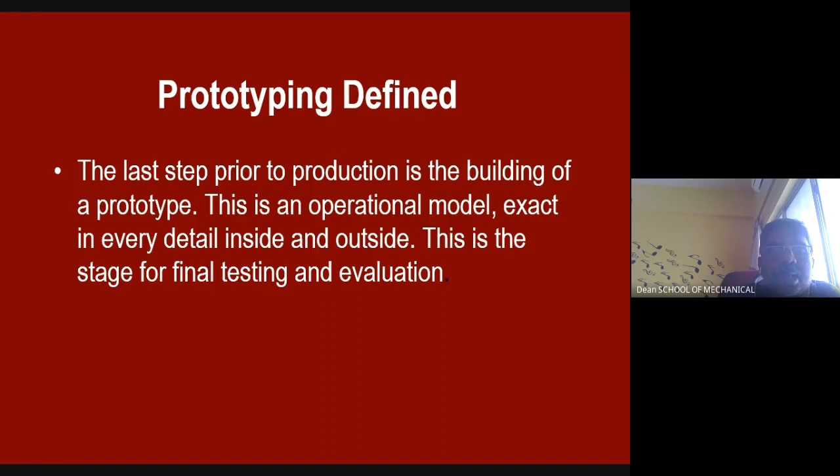Moving on to the introduction part, how is RP classified, and what is the basic principle and concept behind RP technology?

RP technology refers to techniques or methods that allow designers to produce physical prototypes quickly, within a limited span of hours, ensuring the basic functional requirements of the product. It consists of various manufacturing processes by which a solid physical model of a part is made directly from 3D CAD model data.

Whatever component you want to produce should be drafted in standard software and converted into proper CAD files, which are then linked to the RP machine to produce the parts. Different software can be used for this conversion. Depending on accuracy, integrity, tolerance value, need, and mass volume production, we can choose any one of the RP manufacturing processes. There is a wide variety of processes available, and we can choose based on reliability and cost cutting.

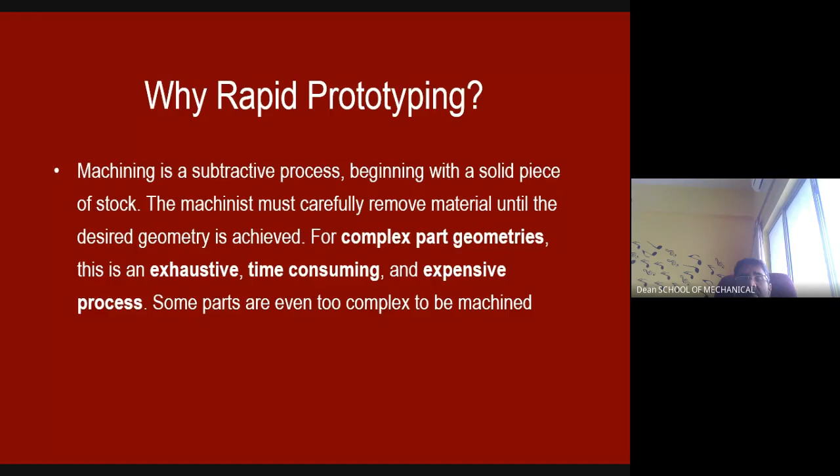Depending upon the concept of RP, we can group the RP techniques in various perspectives.

Generally, all the processes are based on 3D CAD data, a 3D computer aided design data in terms of coordinates and file format. Whatever parts we want to manufacture should be transferred in terms of dimension to the computer with CAD files, either Creo or some other standard software. These 3D data are sliced into thin cross-sectional planes by a computer.

These cross-sections are sent from the computer to the rapid prototyping machine, which builds the part layer by layer, one layer over another. The first layer geometry is defined by the shape of the first cross-sectional plane generated by the computer.

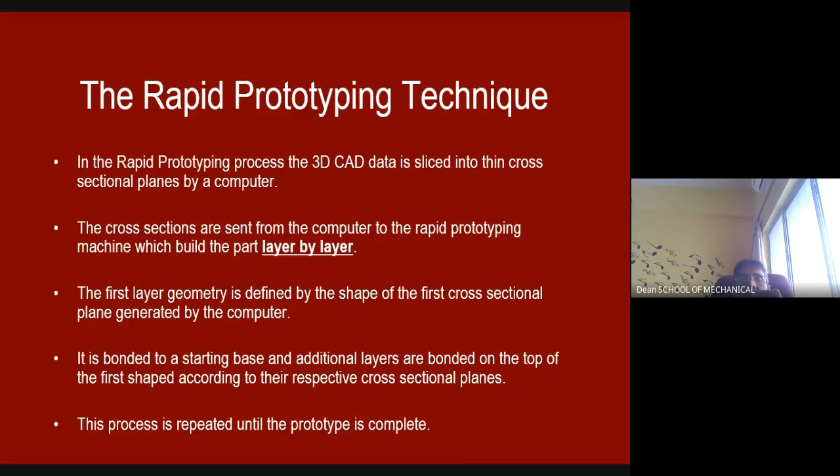The machine can move to and fro in the particular table direction with the particular table specifications to form the required dimensions layer by layer. This process is repeated until the prototype is completed, meaning until the required dimension is obtained. This is the general concept of the RP technique.

What is the RP technique? It is a method in which the part is created by a layer additive process, adding one above another called layer additive, or subtracting called layer subtractive. You can even build the part this way.

Rapid prototyping is a method in which the part is created by a layer additive process using specialized software like Creo, ANSYS, Abaqus, CATIA, or whatever software is available in the market. Using this specialized software, a three-dimensional CAD data or model is cut into very thin layers or cross sections, starting with AutoCAD up to high-end software.

Then, depending on the specific method used, such as sintering, fused deposition modeling (FDM), or SLS, the RP machine constructs the part layer by layer until a solid replica of the CAD model is generated.

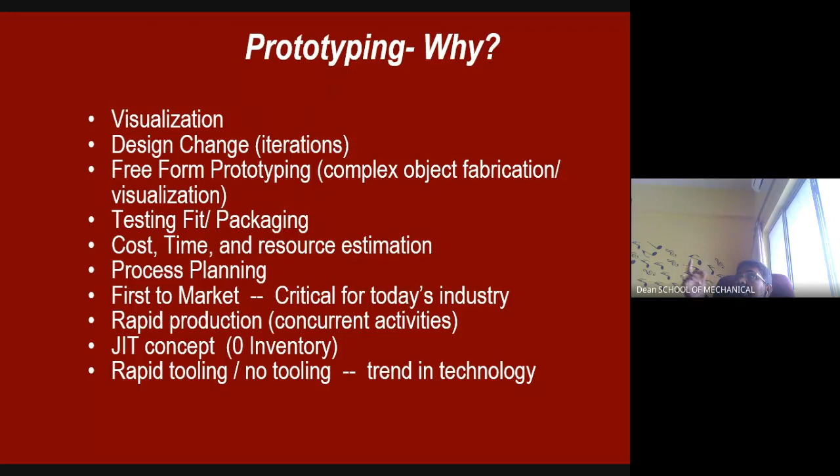And this prototyping is further grouped based on different aspects. One is design verification, tooling, and concurrent engineering. If you take design verification - design for manufacturability, design for the exact manufacturing content required, design for assembly, design for maintainability, design for reliability, design for quality, and design parameters like tolerances and allowances.

So these are all the reasons chosen for adapting prototyping technology. Then concurrent engineering - you have heard of concurrent engineering, also called simultaneous engineering. Tooling - another domain we are focusing on is tooling. Then comes reverse engineering.

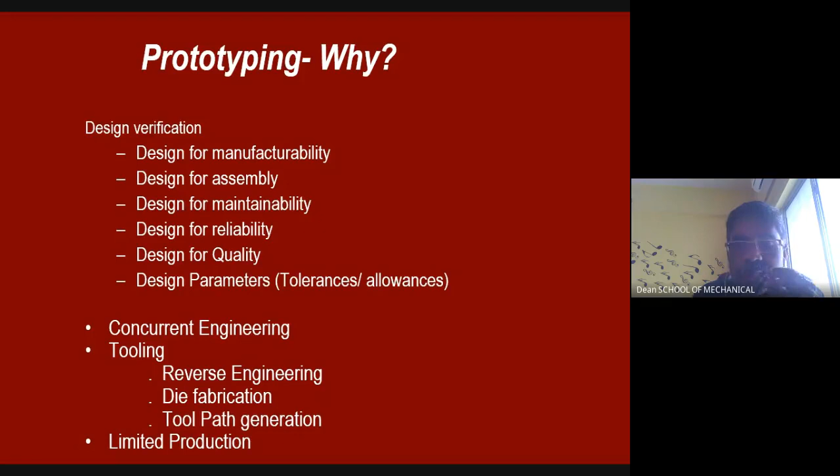Then tool path generation, that is in CNC itself, and limited production. So these are all the areas where prototyping technology is required or emerged.

So this block diagram shows how you build the part - design a part, convert the part, build the prototype. To design a part using computer-aided design, best is a 3D solid model. And those parts designed in a CAD model are fed into or converted into CAD files. Normally the CAD files are in .stl or IGS format.

.stl means standard triangulation language file, or you can say one more file is called IGS, initial graphics exchange specification file. So these files are fed into a machine to build the part. The part can be built by different methods - either FDM method or SLS method or some other method - you can build the part.

This is a general definition, or the block diagram, pertaining to RP technology. Design a part using standard software, and those CAD dimensions are converted to suitable CAD files, normally in the format of .stl or .igs files, and those files are fed into the RP machine to build the required prototype.

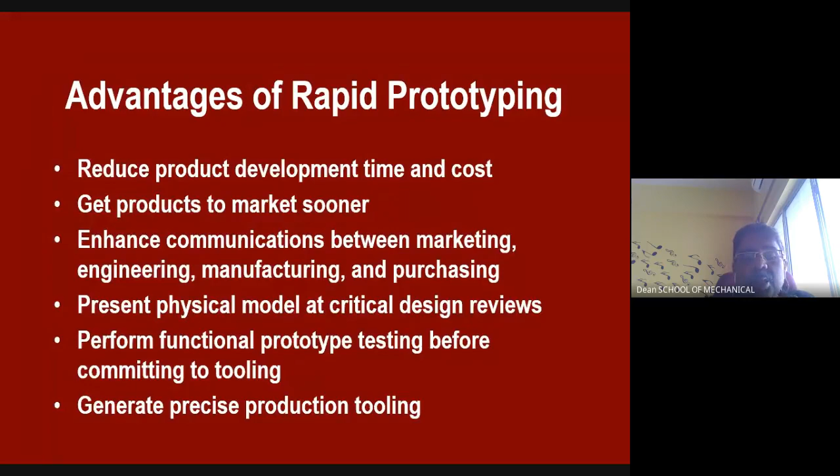So what are all the benefits, as an entrepreneur, as a manufacturer, as the company owner, I can enjoy by introducing RP technology in my firm? Then another question arises: what are the benefits of introduction of RP technology as an entrepreneur, as a manufacturer, as a company managing director? What are the benefits and gain?

First one is visualization, verification, iteration, optimization for design engineers. In order to get a very good design of a particular product, you build the initial diagram, initial design, visualize it, and verify the functional requirement. If changes are required, go for the iteration and do the optimization, especially for design engineers.

Second benefit is communication tool for simultaneous engineering. Like concurrent engineering, we have one more terminology called simultaneous engineering. It is a communication tool for simultaneous engineering. And the third one, very important, is form and fit test of components - the final form and fit test of the components.

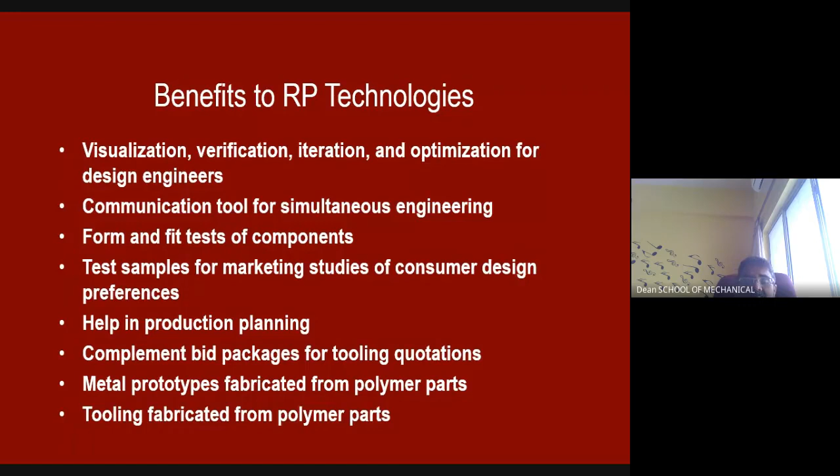Now move on to the types. We already discussed we have different types based on liquid, based on powder, and based on energy source. We can group them into different classifications. The first one is liquid based, solid based, and powder based. So majorly, RP technology is broadly grouped into these three categories: liquid based, solid based, and powder based.

So it depends upon the requirement, depends upon the need, depends upon the specification, depends upon the end use. We can opt for any one of the RP processes, either solid or liquid or powder based. That means the raw materials are prepared into these three groups.

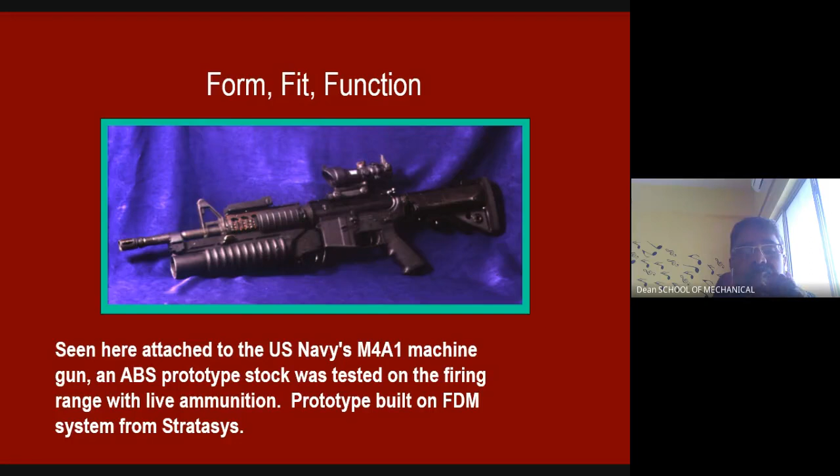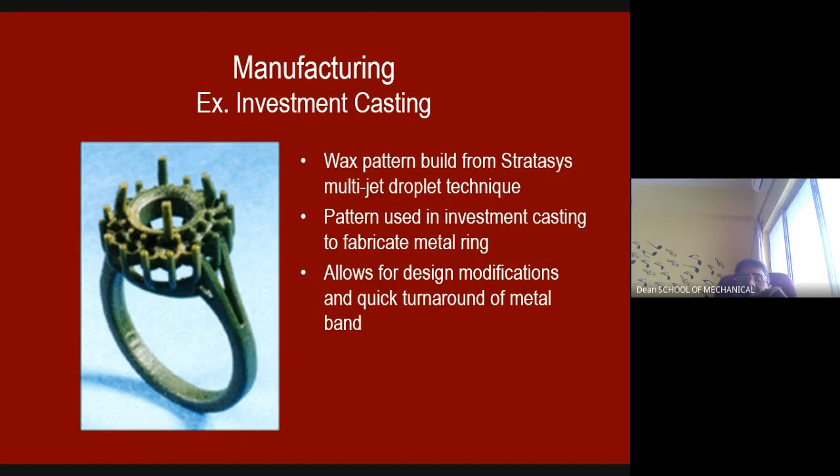Medical use is where you can find the current applications of RP technology - for example, models of cerebral arteria malformation and surrounding skull with data from CT angiogram, built with a stereolithographic RP process, allowing advanced neurological surgery planning.

For example, if a person has a complicated tumor in the brain, before going for regular surgery the surgeon wants to check and train beforehand since he needs to perform a complicated surgery. So he builds the exact type of skull with brain using ABS material, with data transferred from CT scan, and practices which areas need to be removed. This is the major use of this technique in medical industries.

This allows advanced neurosurgical planning, because surgery is very critical and life-threatening, so it must be done in a perfect and crucial manner. We have to train and perform a number of surgeries with a prototype - that is the need for RP in the medical industry.

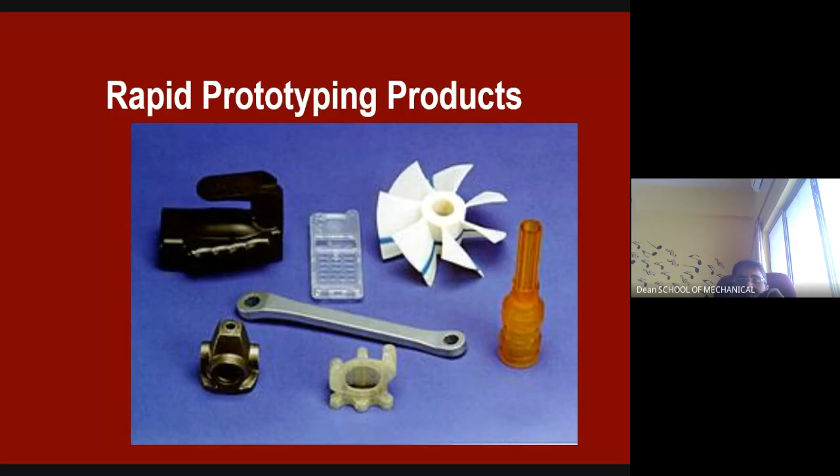Based on the application and types, there is a classification of RP technology. One is the subtractive process, which we call the material removal process - examples are milling, turning, grinding, and machining centers. Used for prototype production, the degree of automation varies.

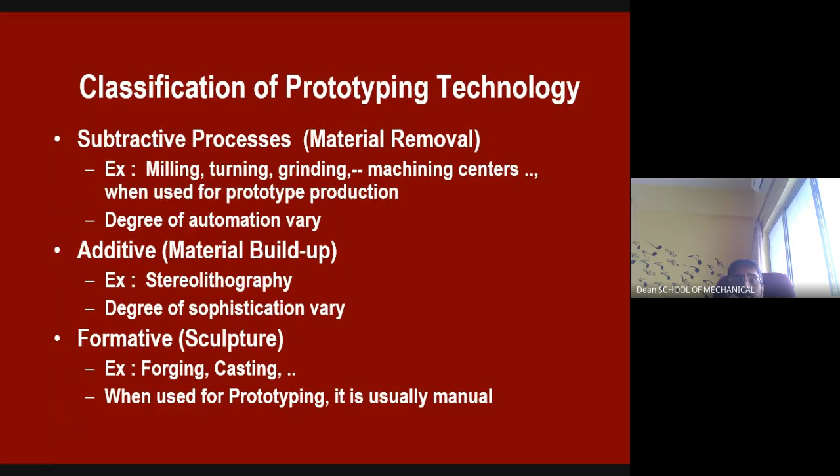The next one is additive, material build-up - we can add material to get the required part. Examples are stereolithographic processes, which we call SLS or SLA. The degree of sophistication varies. Then there's the formative type, that is sculpture type - forging and casting. When used for prototyping, it is usually manual. This is the classification of prototyping technology.

To move on to the rapid prototyping process: the resin cure, made from liquid plastics, we can use a cubital solid process, or a ground curing process, or a light sculpture layer-at-a-time process, or a 3D systems process, or stereolithography. All these use resin as raw material. These are the different versions of liquid-based RP technology - one is cubital solid.

Invented by a company called Cubital, another is ground curing, called solid ground curing, and light sculpturing layer-at-a-time, introduced by another company. And 3D systems, or 3D corporations, introduced a particular liquid-based system called stereolithography. Cubital developed one product, and 3D Systems produced the other.

The next one is lamination. This was invented by Helisys - we call it LOM, laminated object manufacturing. So these are all the different RP processes.

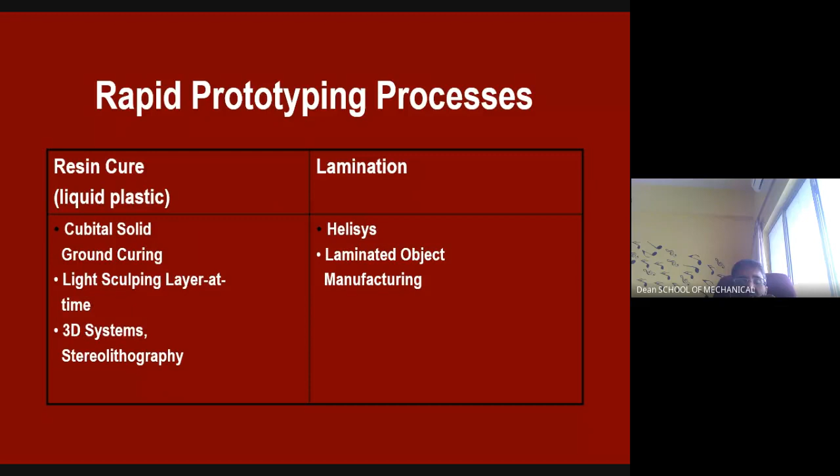This sophistication of technology plays a major role in different domains: one is the fabrication process, another is the degree of automation required, and third is the ability to build complex objects. For the fabrication process, the process must take material in some shapeless form and turn out solid objects with definite shape - this is called the fabrication process.

For the degree of automation - a high degree of automation is needed. Since prototyping is a stage in a cycle, the technology is expected to enable automated chaining to the before and after links in the cycle. Finally, the ability to build complex objects - the more complex the build object, the more sophisticated the technology.

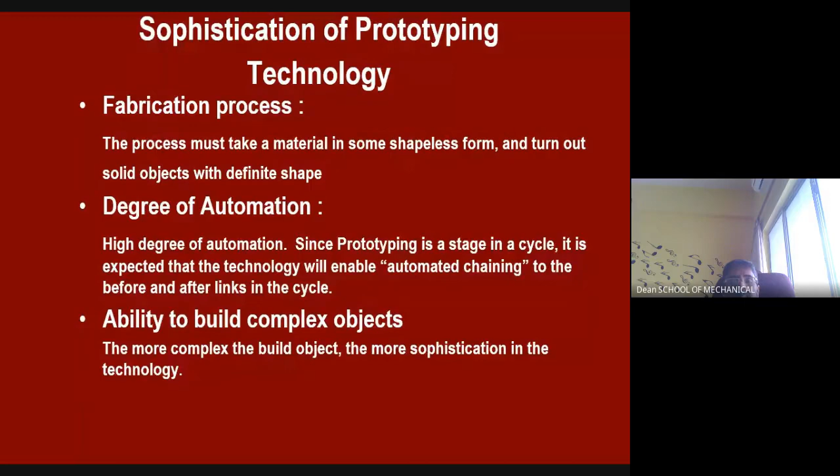And tooling, there is no tooling at all. Less tools is better. So why is the technology sophisticated?

I am listing all the features. One-shot operation, so a single part is produced with entire dimensions, entire assembly. One-shot production, no assembly of parts, etc.

Time: the less the time, the better. A closeness to serve the purpose of the prototype, that means accurate representation of the design. Flexible: should be a flexible one, that is modification, additional parameters, and scaling will be done whenever required.

Equipment depends upon the size, weight, maintenance, and cost. We can group into different RP equipments. Economical, both equipment and operating cost.

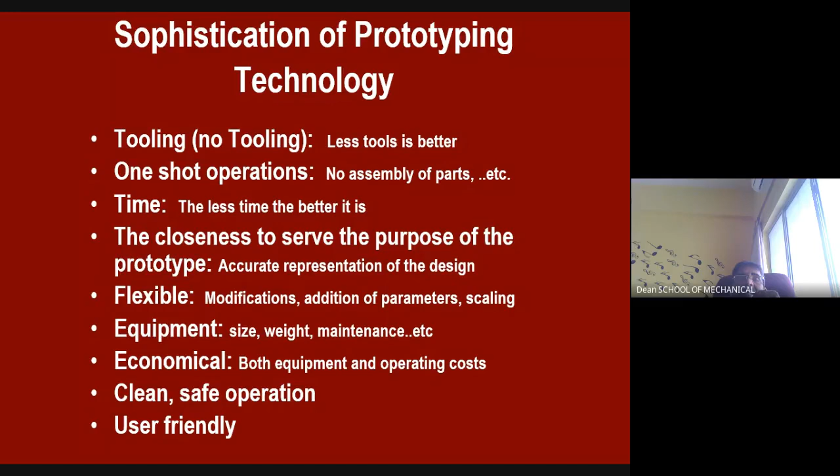User friendly: more versatile, more user friendly. There is no need of a skilled operator required. We need minimal skill to run the machine. Once you know the conversion of CAD into the required geometry, you just switch on the machine, push a button, and it starts producing. So there is no need of a skilled operator. It should be a user friendly one.

So based on the above benefits, advantages, and technology development, we group the RP process into 3 major divisions. Generally nowadays many more divisions are coming, but from 1987 onward these are the major divisions.

One is fused deposition. The companies are Stratasys and FDM. Then sintering, the company is called DTM Corporation. The process is called selective laser sintering.

Then the third one is ballistic particle, called BPM, ballistic particle manufacturing. The company is called 3-Dimensional Printing, or you can say droplet formation, ballistic impact primitives, and surface formation. So these are all the 3 general categories

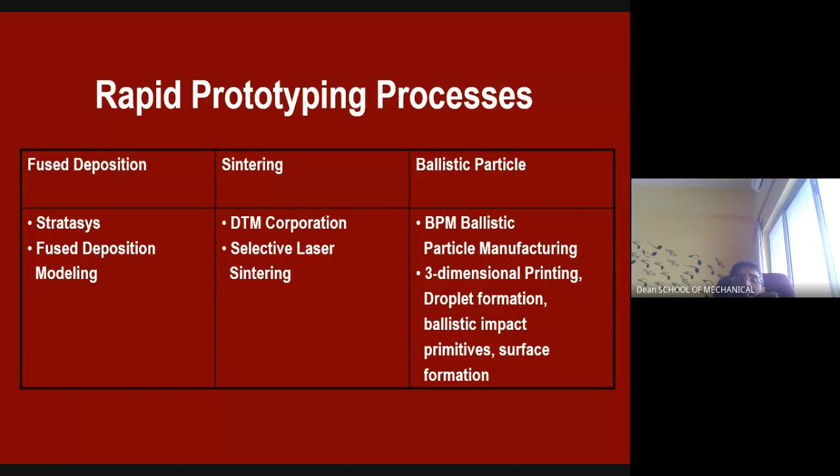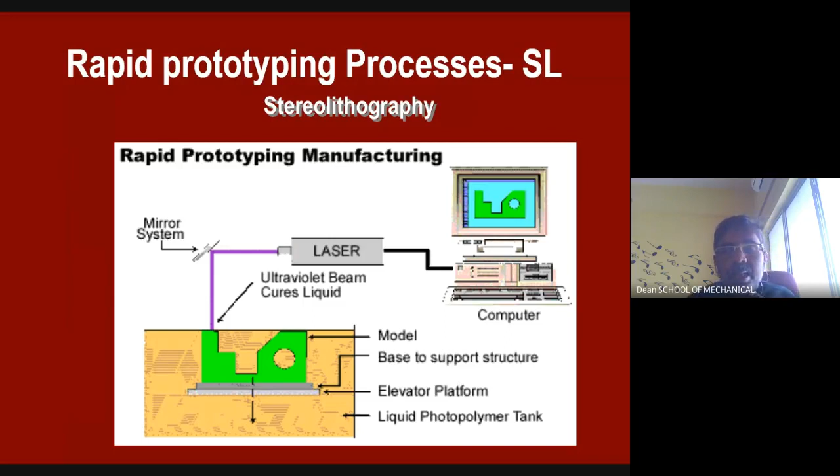Another view of the stereolithography process.

For stereolithography, we use a laser. This is the component to be fabricated, a mechanical component with a boss and a circular flange. We are able to manufacture it by depositing in a tank and build the part. So the resin is poured inside this tank.

The dimension of the part comes from the computer. Once the heat from the laser emerges, it starts hardening and builds the layer by layer. Once the required dimension is obtained, the bottom plate and support are removed and dissolved, to be used once again for the next production.

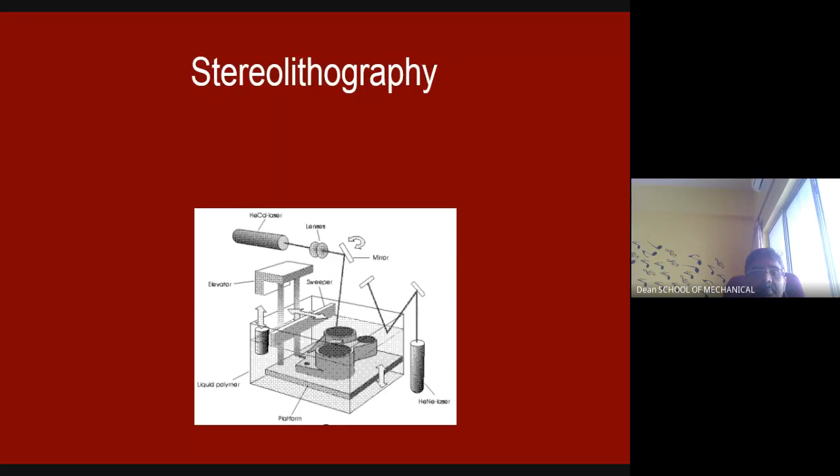This technology emerged in the year 1986 and was patented. This is the first kind of RP revolution. This technique builds 3D models from liquid photosensitive polymers that solidify when exposed to ultraviolet rays.

See the concept? The technique builds three-dimensional models from liquid photosensitive polymers that solidify when exposed to ultraviolet rays. As shown in the figure above, the model is built upon a platform situated just below the surface in a vat of liquid epoxy or acrylate resin.

A low power, highly focused UV laser traces out the first layer, solidifying the model's cross section while leaving the excess areas liquid. This is the basic concept of stereolithography. It uses a liquid resin and laser heat to harden the resin part and get the required product.

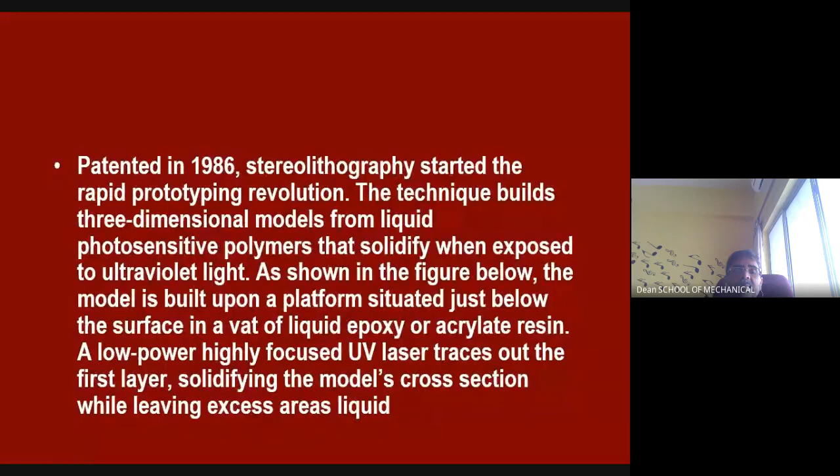To continue the concept, an elevator is present which can function incrementally, lowering the platform into the liquid polymer. The part is dipped into the liquid solution in an incremental mode, say 5 mm at a time, lowering the platform into the liquid polymer.

A sweeper recoats the solid layer with liquid, and the laser traces the second layer at top. This process is repeated until the prototype is completed.

Afterwards, the solid part is removed from the vat and rinsed clean of excess liquid. The supports are broken off and the model is then placed in an ultraviolet oven for complete curing. This is the concept of this technology.

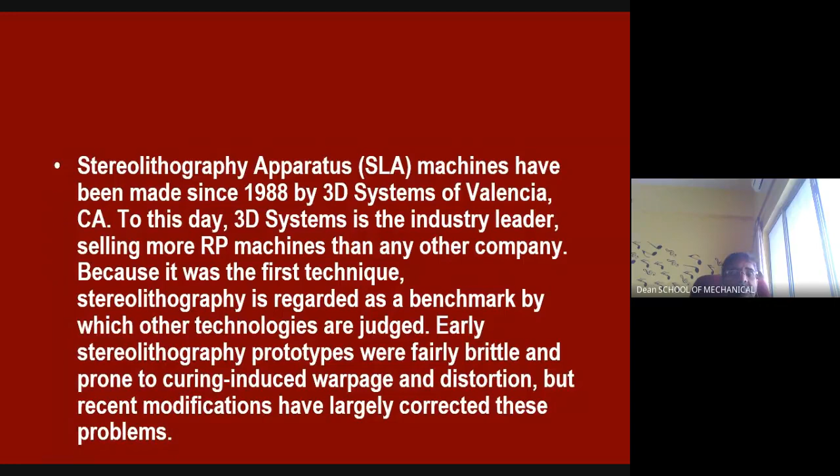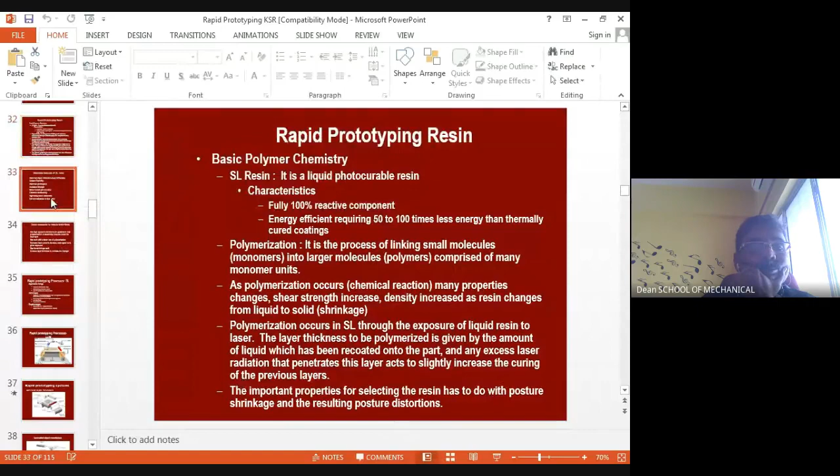The desirable features of SL resins.

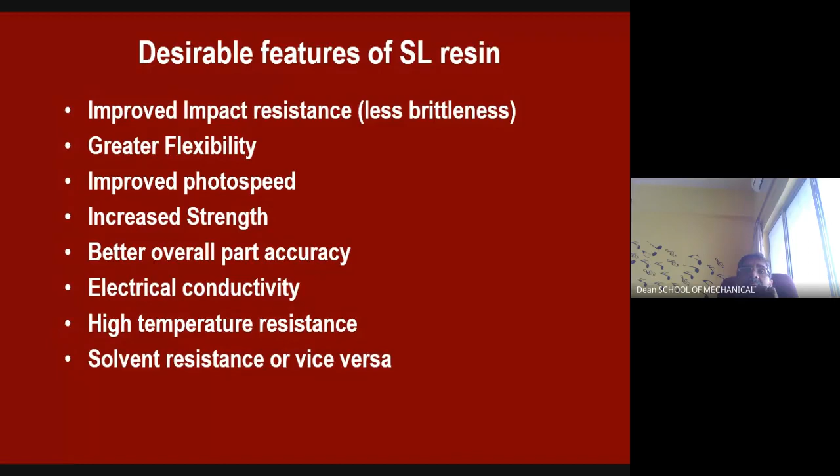The desirable features of SL resins are improved impact resistance, greater flexibility, improved photo speed, increased strength, better overall part accuracy, electrical conductivity, high temperature resistance, and solvent resistance or vice versa. These are all the desirable features of stereolithographic resins used.

Some measures to reduce the distortions: use high exposure and slow scan speed such that the polymerization is essentially complete under the laser spot. Use resin with faster rate of polymerization. Decrease the laser power to decrease the scan speed for a given exposure. Use low shrinkage ratio. Increase the layer thickness to increase the strength. These are some measures to reduce the distortion during the process.

The SL process has some application range: parts used for functional test, manufacturing of medical models, form fit functions for assembly test. The advantages are no geometric limitations, high resolutions, can be fully automized, and no supervision is required at all. Possibilities of manufacturing parts which are impossible to produce conventionally in a single process.

The disadvantages: necessity to have a support structure which adds additional cost, requires labor for post-processing and cleaning. We need additional labor to do the post-processing and cleaning process. These are the few disadvantages.

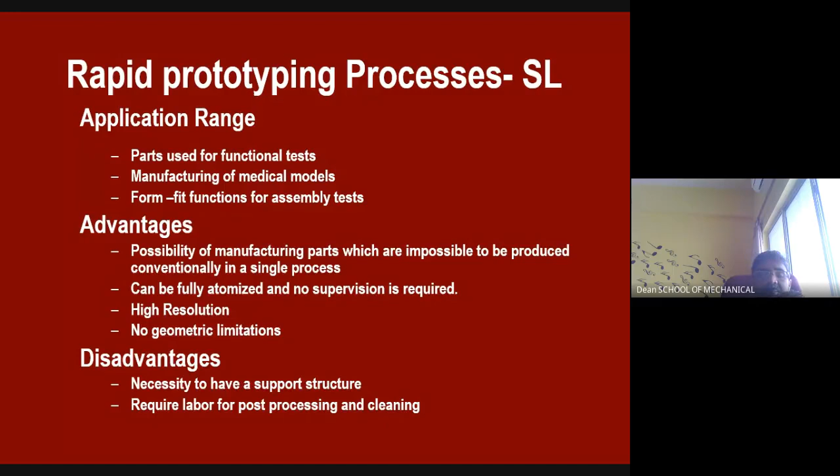The next one is LOM, laminated object manufacturing. This is also one type of that process. The raw material is in form of rolls. The rolls are fed into the bed.

While the rolls are running, the platform is raised. Wherever the dimensions are needed, due to the heated lasers, the parts are manufactured. This is called laminated object manufacturing. Wherever the dimension is required, the heat is applied and required part is produced and collected in the platform.

The supply roll supplies the material, and the take-up roll is used to wind it. After that, a roller is there, rolled over the raw material such that the part is produced and deposited in the platform.

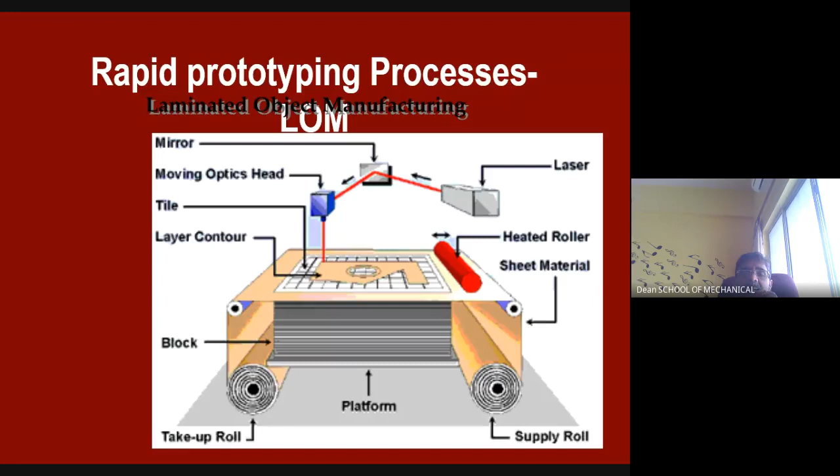Another view of RP, laminated object manufacturing, shows how this can be worked out. So what all the parts constitute LOM? It consists of a laser, a take-up roll and platform, material supply roll, sheet material, laminating roller, laser, heated roller, positioning device, and optics to focus the laser beam to the required zoom.

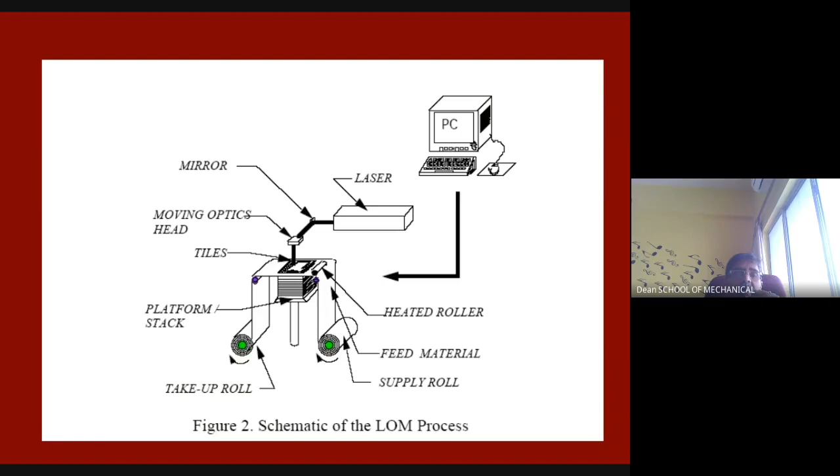This is a diagram of the LOM in a simplified version, so as to understand and know what parts are available.

This technique was introduced by a company called Helisys of Torrance in CA. They use adhesive coated material, where sheet materials are bonded together to form the prototype. The supply roll supplies it, and the winding roll winds it. This roll is used to build the part, as adhesive coated sheet material is bonded together to form the prototype.

The original material consists of paper laminated with heat-activated glue and rolled upon spools. As shown in the figure, the feeder or collector mechanism advances the sheet over the build platform. Then the focused laser cuts the outline of the first layer into the paper and cross-section hatches the excess area. During the build, the excess material provides excellent support for overhangs and thin wall sections.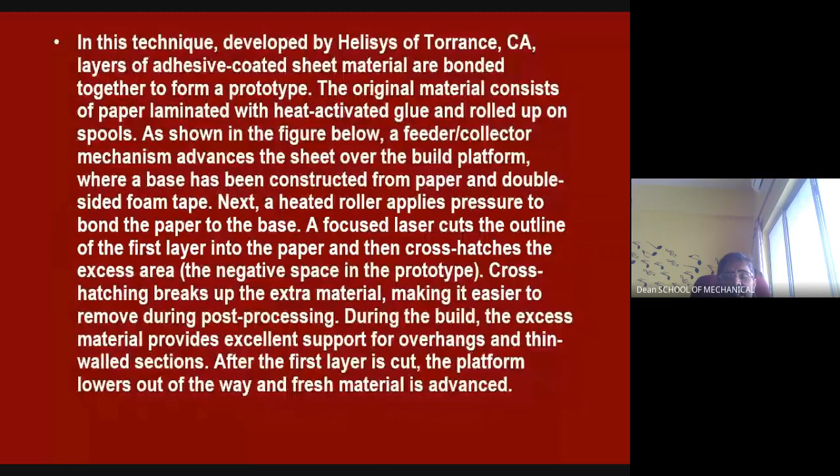After the first layer is cut, the platform lowers the cut out of the way and fresh material is advanced. Once the first material is cut, it's dropped down via the platform and the sheet is rolled. The second layer then starts the cutting process. This is the working principle.

After 2001, this is no longer in business, due to the development of a few more technologies. This particular technology ended its life history in the year 2001.

Application range includes visual representation models, large bulky models, or sand casting patterns. The advantages: a variety of organic and inorganic materials can be used, the process is faster than other processes, there is no internal stress and undesirable deformations, and LOM can deal with discontinuities where objects are not closed completely.

Disadvantages: hollow parts cannot be built using LOM, and parts with thin walls in the z direction cannot be made using LOM. The stability of the object is bound by the strength of the glued layers. So these are the disadvantages.

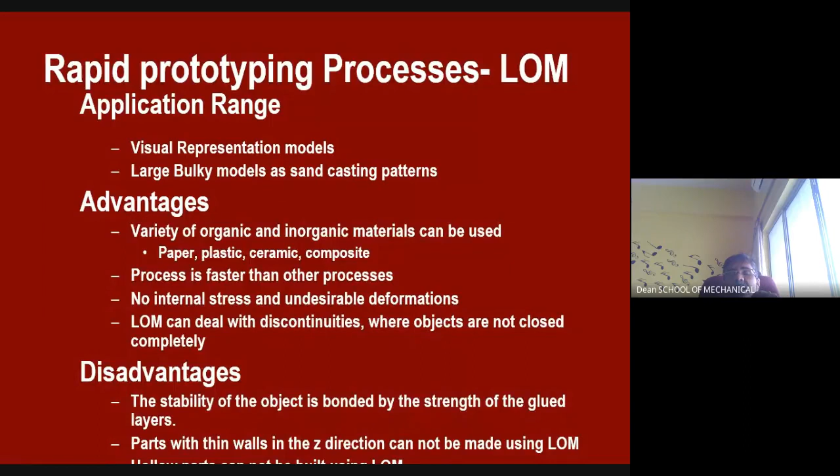The next one is FDM, the FDM machine.

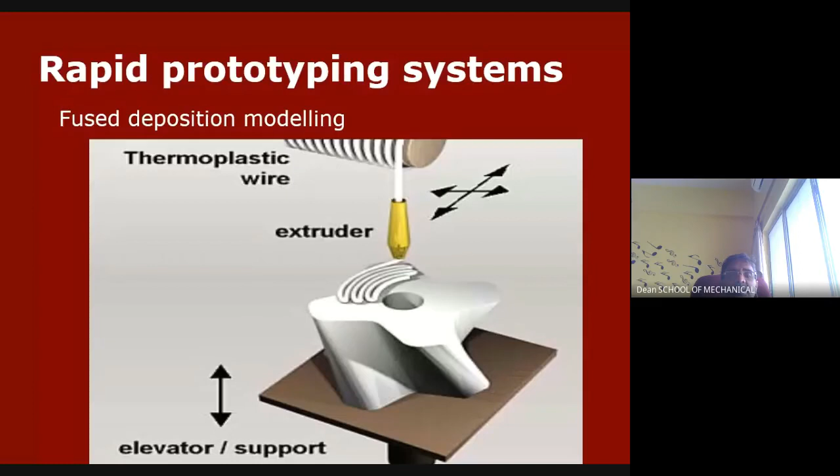This is an FDM machine. It has wires, thermoplastic wires, rolled in a spool. It continuously deposits material to form the product, using the fused deposition modeling process. CAD diagrams are transferred to the machine, where the real part is produced using the FDM process.

Next is sintering. You can use powder technology for building the part, using a laser sintering process. Selective laser sintering focuses the laser wherever the zone is required to be sintered, using a carbon dioxide laser. The object is sintered and compacted wherever the laser is exposed to that zone.

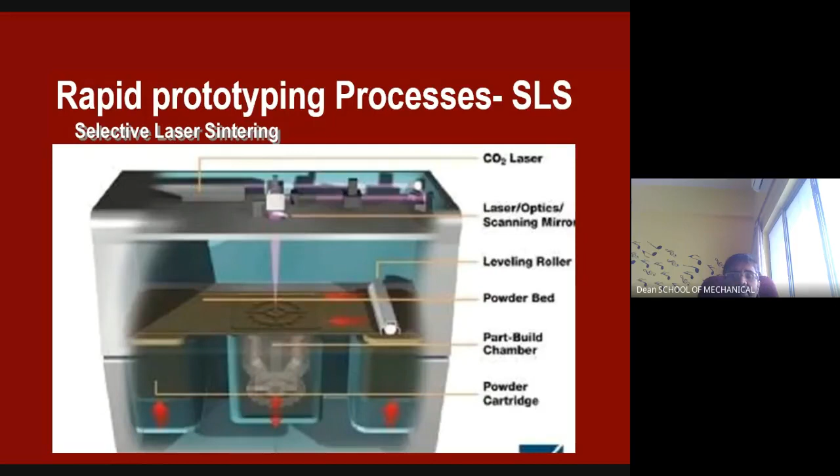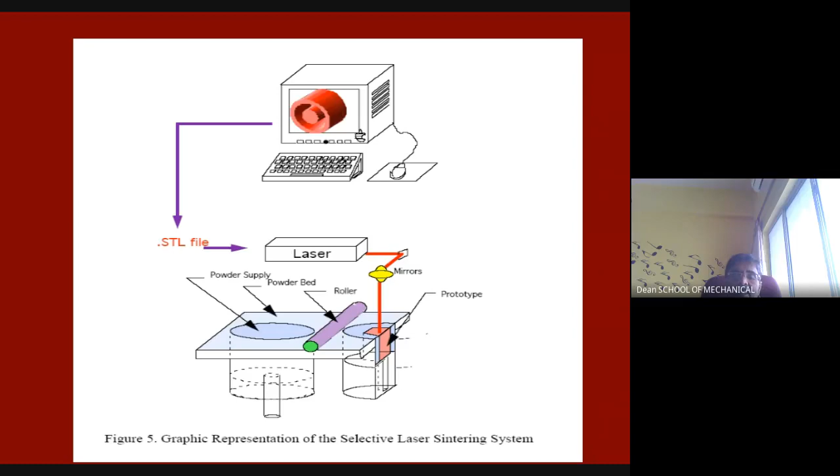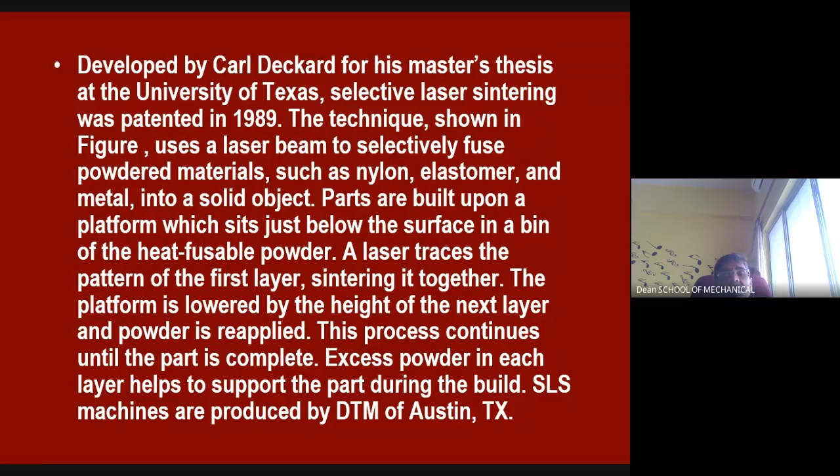This was developed by Carl Deckard in 1989, at the University of Texas, and later streamlined and improvised by a separate company called DTM Corporation in Austin, depending on the need, usage, and modification.

Moving to the application range: visual representation, functional tough prototypes, and cast metal parts. Advantage: flexibility of materials used, and there is no need to create a structure to support the part. Parts don't require post-curing, except where ceramic is used. Disadvantage: during solidification, additional powder may harden at the borderline, and roughness is most visible when parts contain sloping or stepped surfaces.

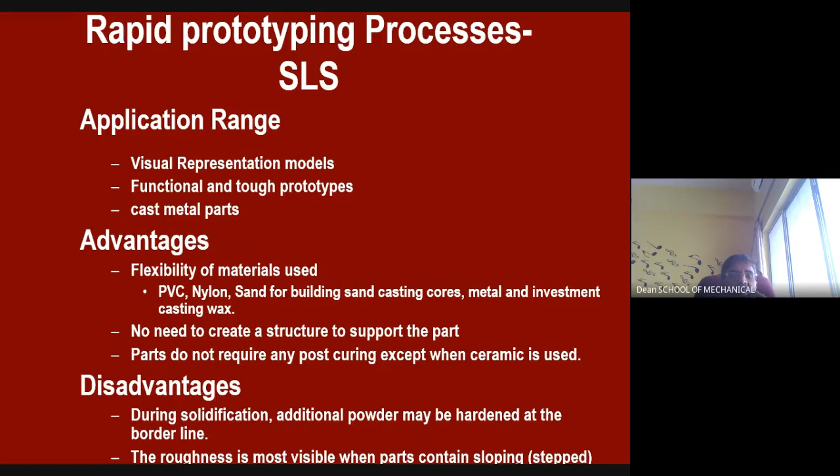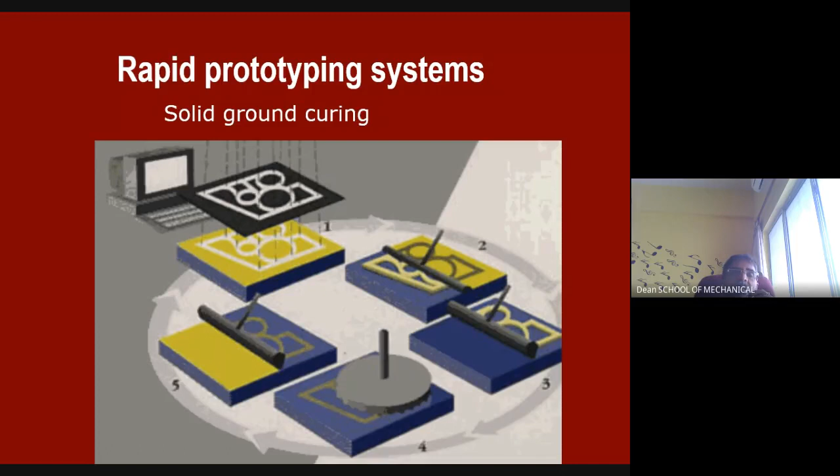The steps are: spray resin, develop photo mask, expose mask, vacuum unfilled resin, spray wax, and mill pad. These are the given steps: spray mask, expose, and so on.

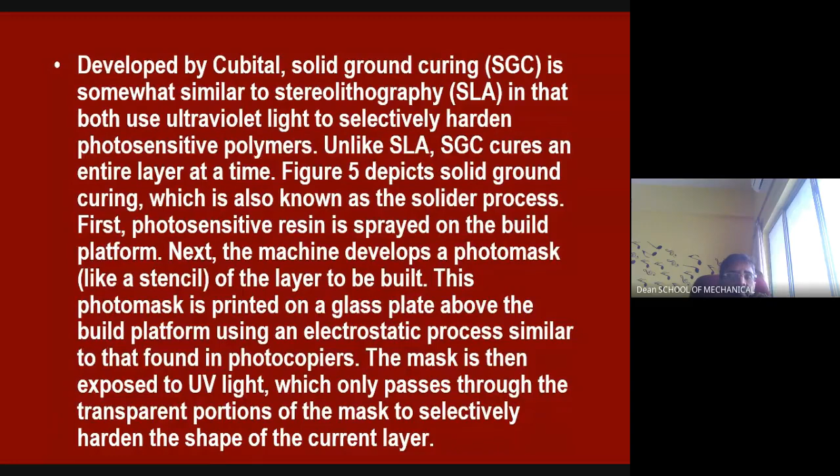This was developed by a company called Cubital. It is also called SGC, solid ground curing. It is similar to the SLA process, also using polymers as well as ultraviolet ranges, on glass plates.

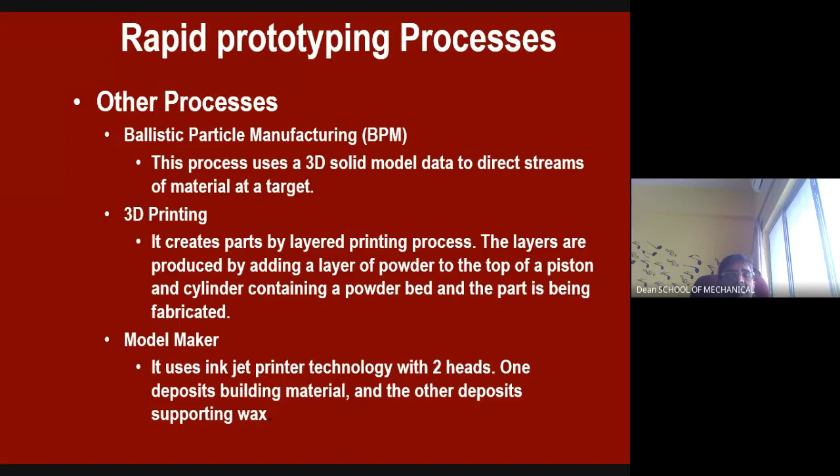Apart from this, a few more processes are available: ballistic particle manufacturing, 3D printing, and model maker. This is an advanced version of 3D printing technology. Moving on to fused deposition modeling.

In this technique, filaments of heated thermoplastic are extruded from a tip that moves in the XY plane, like a baker decorating a cake. A controlled extrusion head deposits very thin beads of material onto the build platform to form the first layer. The platform is maintained at a lower temperature so the thermoplastic quickly hardens. After the platform lowers, the extrusion head deposits a second layer upon the first.

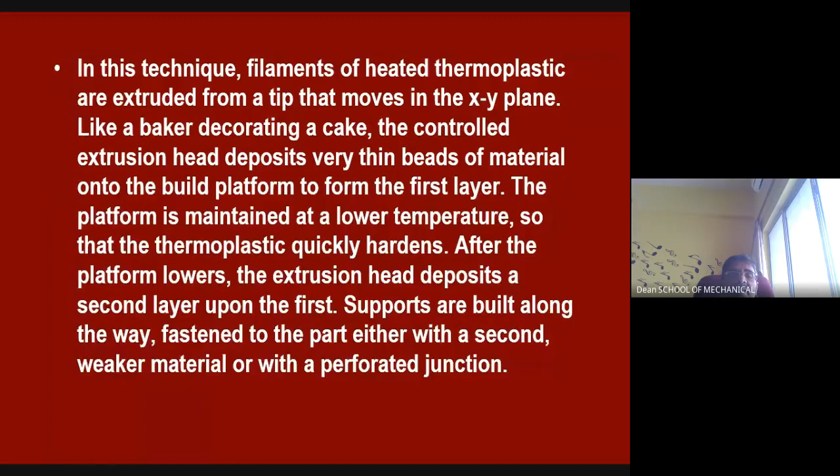Supports are built along the way, fastened to the part either with a weaker bond material or with a perforated junction.

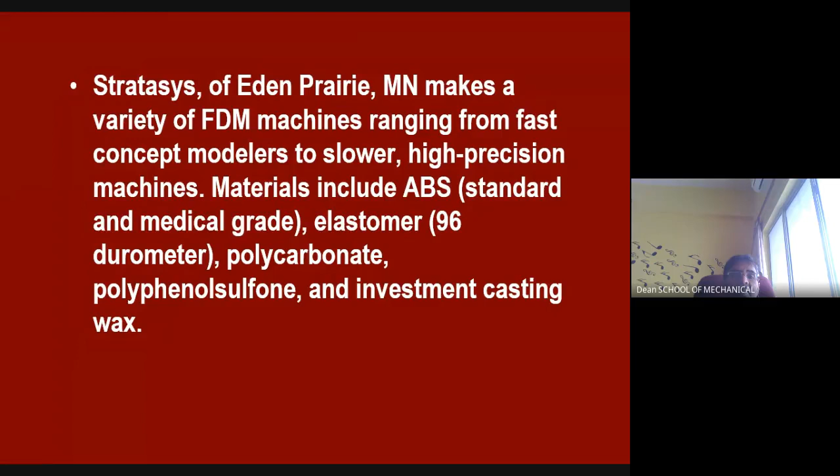The company is Stratasys. Materials used are ABS material, elastomers, polycarbonate, or polyphenylsulfone, and investment casting wax.

The application range, as already mentioned, includes construction modeling and quick-form applications. Advantage: quick and cheaper, with no worry of exposure to toxic chemicals. Disadvantage: restricted accuracy due to the shape of the material used; wire size is a maximum of 1.27 diameter, beyond which you cannot use this process.

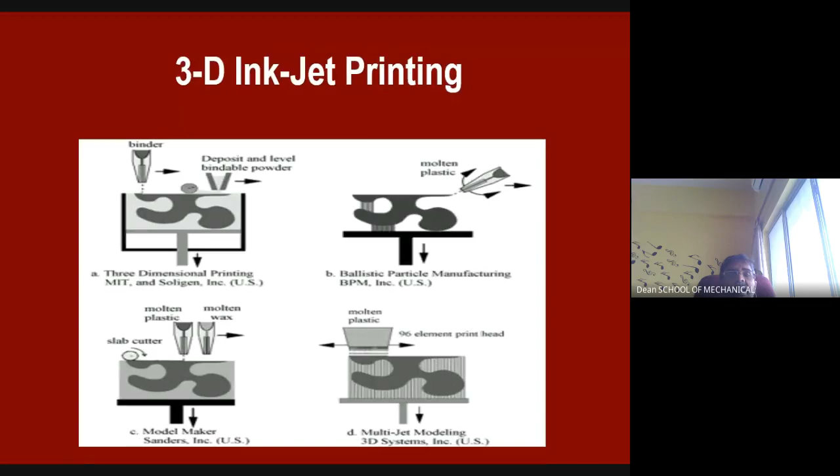This is an extended version of FDM called 3D inkjet printing. It was introduced by a person from Soligen Corporation, developed by MIT, and commercialized by a company called Z Corporation with their 3D printer.

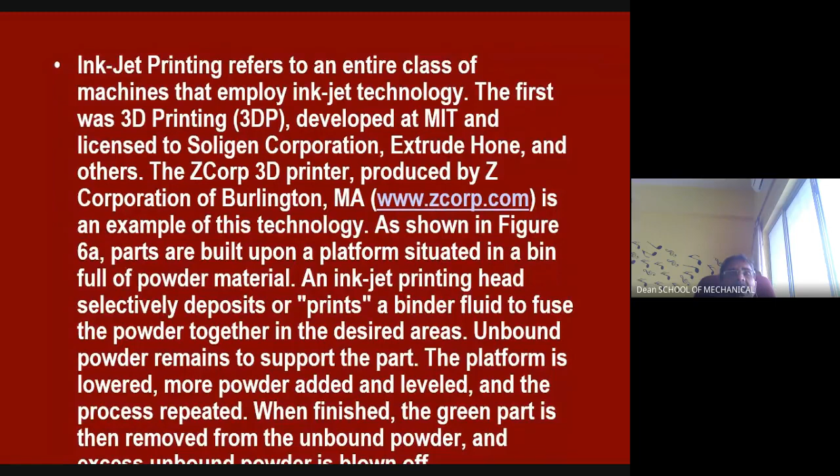It works on the principle of inkjet printing, similar to laser-based methods. Whatever printer is used in day-to-day activity follows a similar basic principle behind inkjet printing. Just as you draw a diagram on a computer and click print to get a printout like a Word document, similarly you draw a component diagram, click the print icon, and get the product using a 3D printer.

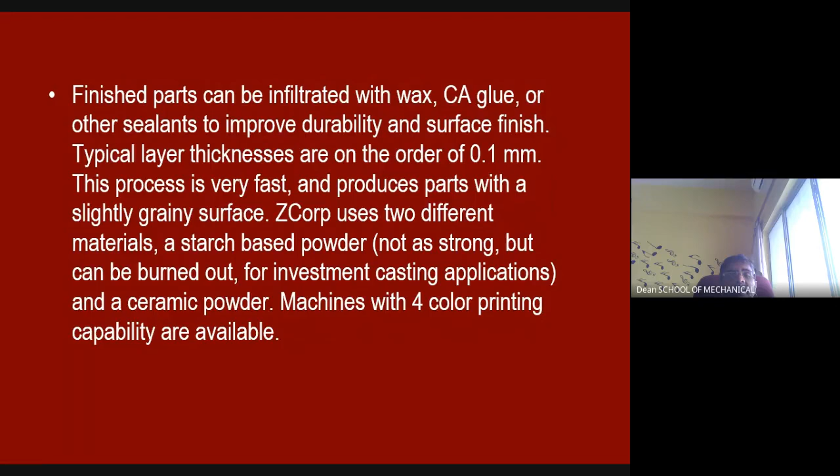A company called Cubital, a company called 3D Systems. I'm taking the process trade name. It is Cubital or Solider. It is called stereolithography.

The cost is in thousands of dollars, and this first version is 250. The work envelope, the maximum size is 20 by 14 by 20. It is 20 by 20 by 23.

The process is resin cured by UV light, transmitted through a mask. Here resin is cured by laser using a weave technique and post cure. Advantages: large work envelope, can build several parts at once, and uses wax to support the prototype.

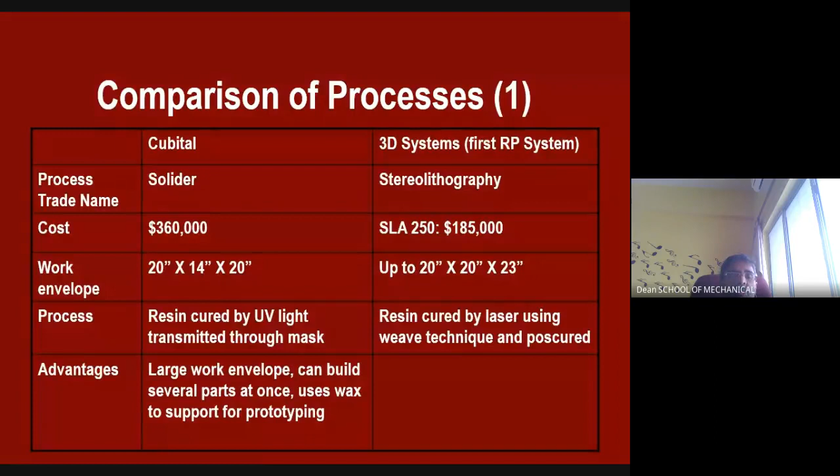Do the comparison to light sculpting and Helisys. The process name or trade name relates to layer-at-a-time. This is called LOM.

It costs around $99,000, ranging from $85,000 to $140,000. Work envelope is 6 by 6 by 9 inches, up to 20 by 30 by 20 inches. The process uses resin cured by UV light through a series of photoplotter-prepared masks. LOM cuts paper or plastic sheets.

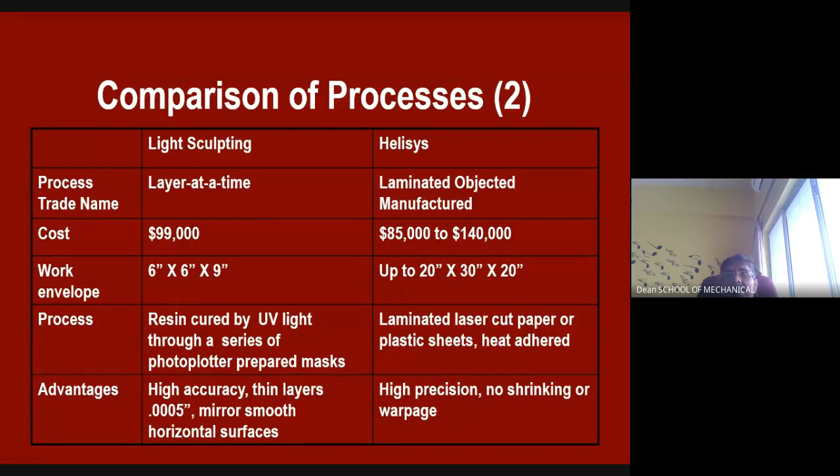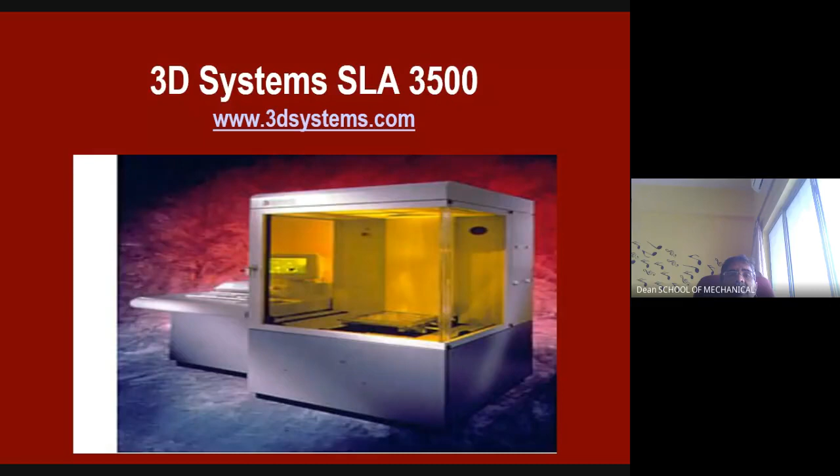So let's go to the cost comparison and time comparison. For the 3D system, if you use the SLA 500 machine, it consumes 7 hours and 3 minutes, whereas Cubital Solider consumes 11 hours and 21 minutes, whereas DTM Sinter consumes 4 hours 55 minutes. So the cost is here. From this we can understand which one can be preferred for our studies or for our production line.

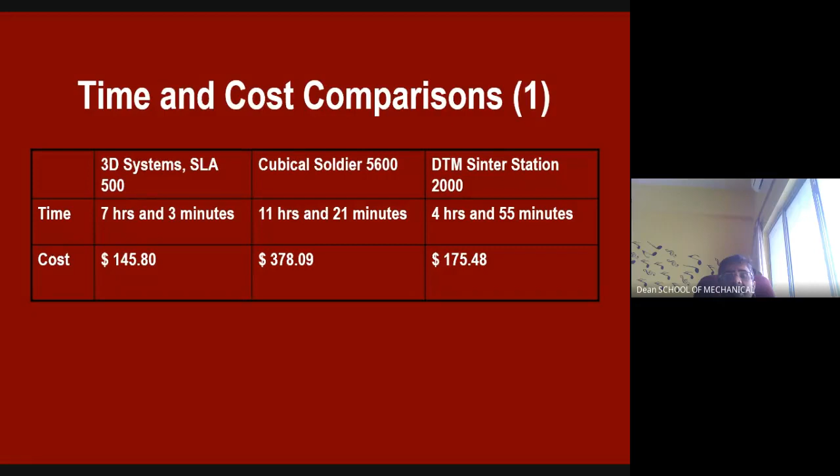So these are the types of modeling techniques available: wireframe modeling, surface modeling, and solid modeling. The CAD input systems, how are CAD systems converted?

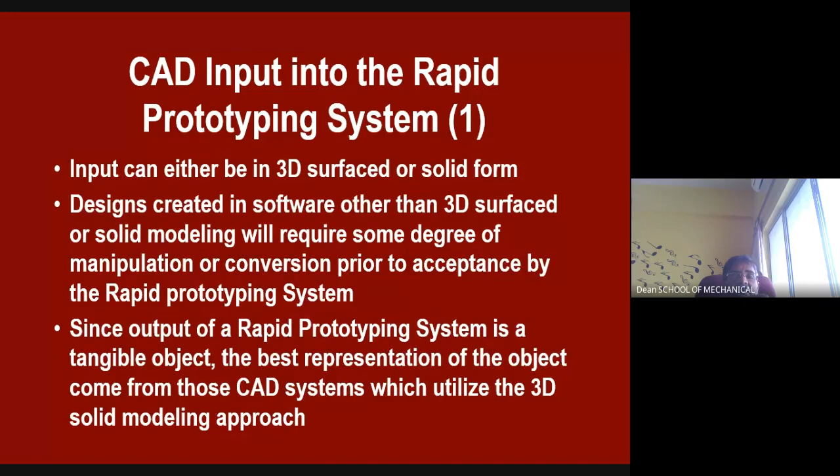We have the IGS file, initial graphics exchange specification file, or the .stl stereolithography file format, or standard triangulation language file. Apart from this, we can use a few more CAD files. It depends upon the company's choice.

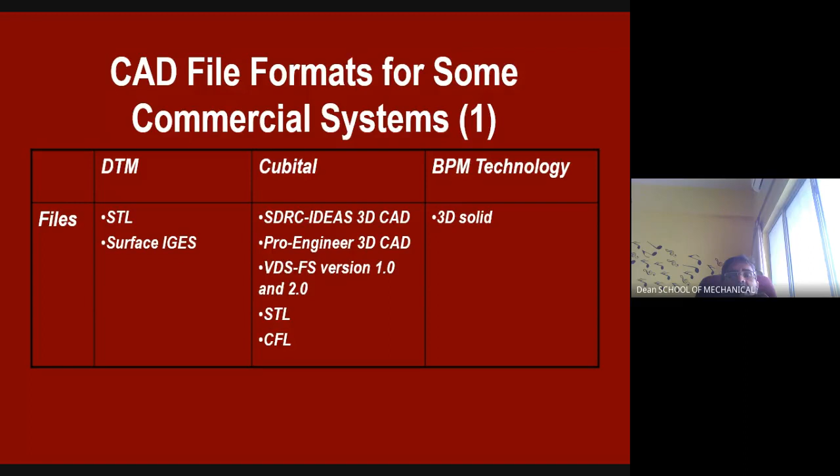The DTM Corporation used .stl and IGS, whereas Cubital used Pro Engineer, STL, and CFL, Cubital facet list file, whereas BPM Technology used 3D solid model. Again, other companies: Light Sculpting Incorporated used .stl, DXF, IGS, Helisys. Company Stratasys use this one.

Move on to the medical application for 3D printing. So far we discussed about the different versions of printing technology, different versions of printing process, conversion parameters, and the keen process of manufacturing a product.

Now to the medical application for 3D printing. So this is modeling, printing, and finishing. Virtual blueprints from computer-aided design or animation model software are sliced into digital cross-sections to be used as guidelines for printing. This is machine printing.

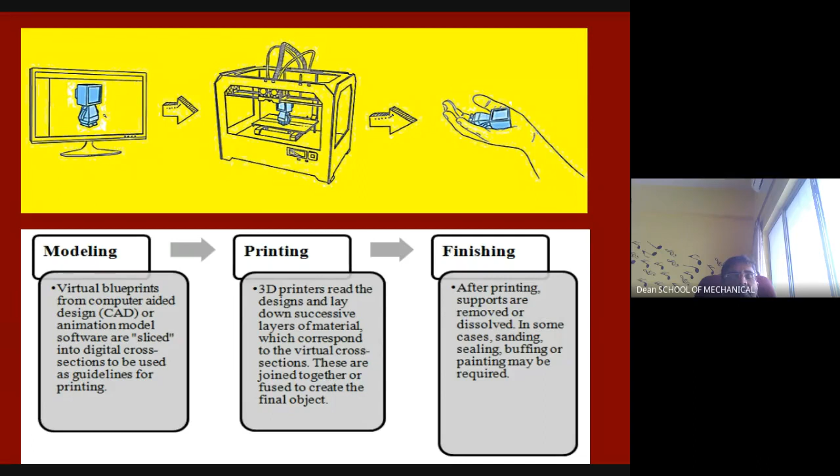3D printers read the designs and lay down successive layers of material which correspond to the virtual cross-sections. These are joined together to create the final object. In finishing, supports are removed or dissolved. In some cases, sanding, sealing, buffing, or painting may be required. So these are the machines.

Tissue or organ failure due to aging, diseases, accidents, and birth defects is a critical medical problem. So current treatment for organ failure relies mostly on organ transplant from living or deceased donors. However, there is a chronic shortage of human organs available for transplant.

Approximately in May 2016, 121,000 people in the US were waiting for an organ transplant. The organ transplant surgeries are also expensive, costing more than $500 billion.

An additional problem is that organ transplantation often involves the difficult task of finding a donor whose tissue matches. If the tissue is not matched, it leads to issues. Therapies based on tissue engineering and regenerative medicine are being pursued as a potential solution for the organ donor shortage. So these are all the issues needing the application of 3D printing process in the medical field.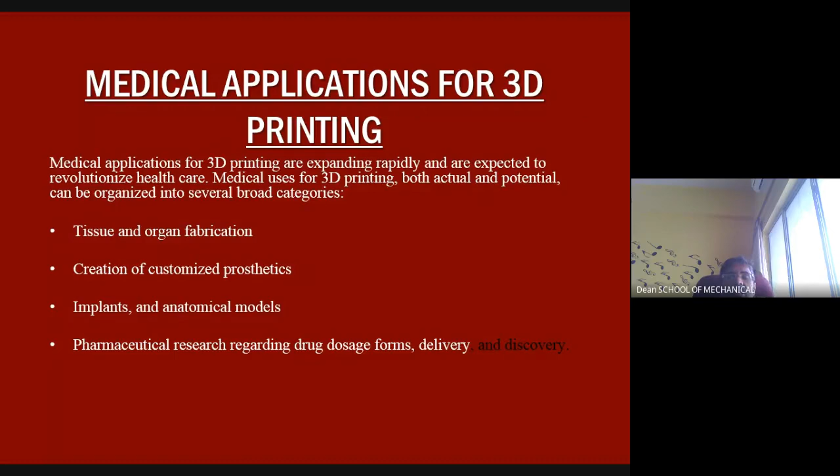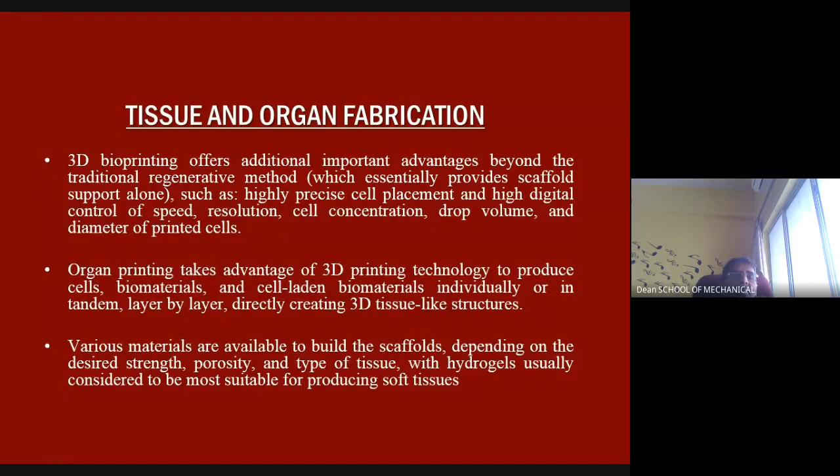Now let's go to tissue and organ fabrication, how it is done. What are all the parameters to be considered while going for tissue and organ fabrication? There is 3D printing, 3D bioprinting, and customized implants and prosthetics. It is used to fabricate implants for dental, spinal and hip implants within 24 hours.

Previously, before implants could be used clinically, they had to be validated, which is very time consuming. Now we see the commercial and clinical success of customized implants and prosthetics. The research team at the BIOMED Research Institute of Belgium successfully implanted the first 3D printed titanium mandibular prosthesis, showing the commercial clinical success of customized implants.

Today, 99% of hearing aids that fit into the ear are custom made using 3D printing. Previously it was done using ordinary metals, but nowadays 99% of hearing aids are made up of 3D printed parts.

Anatomical models are used for surgical preparations. As I already told you, when a tumor is there, how can surgical operations be performed? We need training, or we need models to do that. So these anatomical models can be made with bioprinting technology or 3D printing technology. These are the two elements we can make.

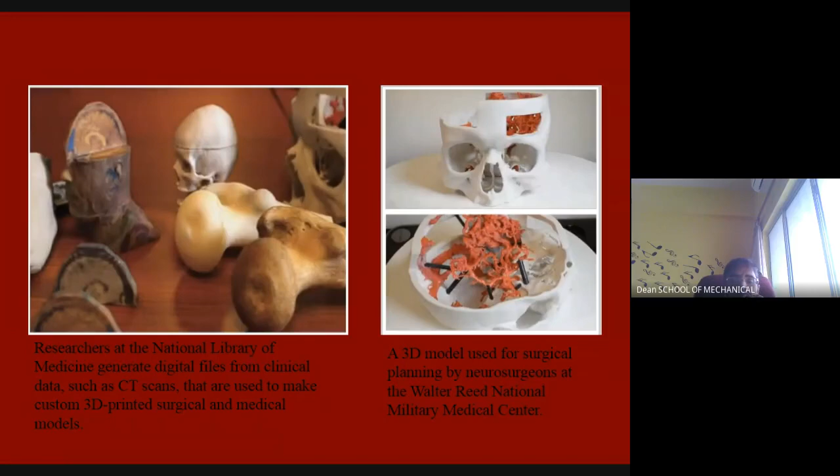It can even be used for drug deliveries. Complex drug profiles are also possible.

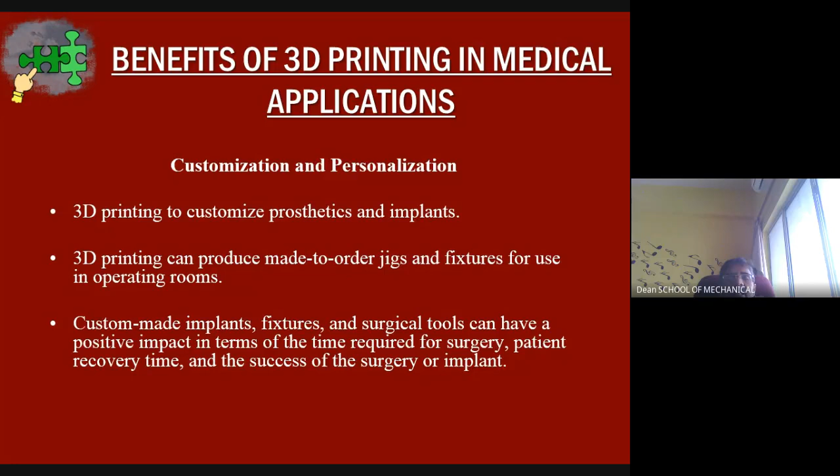Benefits of 3D printing in medical applications include customized prosthetics and implants. Printing can produce made-to-order jigs and fixtures for use in operating rooms. Custom made implants, fixtures and surgical tools can have a positive impact in terms of time required for a surgery, patient recovery time, and success of the surgery and implant.

Other benefits include increased cost efficiency, enhanced productivity, and collaboration democratization. Another area where you can find the application of 3D bioprinting is in this domain.

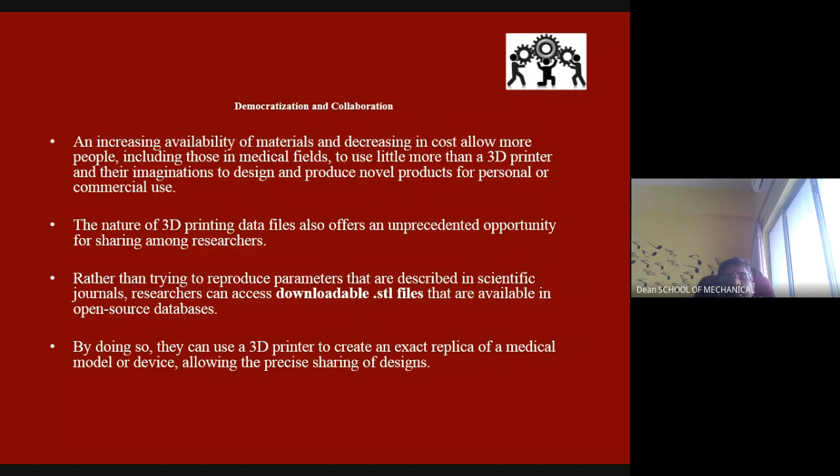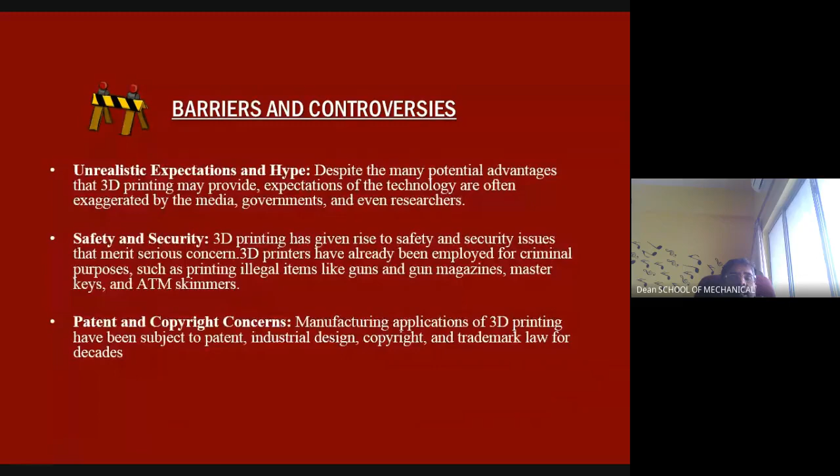There's a 3D Print Exchange done by NIH, the National Institutes of Health. There are also barriers and controversies we have faced, majority being unrealistic expectations and hype, safety and security, and patent and copyright concerns. These are all the barriers and controversies we have faced.

3D printing has become a useful and potentially transformative tool in a number of different fields, including medicine. As printer performance, resolutions, and available materials have increased, so have the applications. Researchers continue to improve existing medical applications that use 3D print technology and to explore new ones.

The medical advances that have been made using 3D printing are already significant and exciting, but some of the more revolutionary applications, such as organ printing, will need to evolve. In conclusion, there are a few images made with 3D printing in the medical field.

A Harvard team 3D prints blood vessels. These blood vessel lined tissues could one day be used to test drugs.

3D printing creates low-cost prosthetic fingers. And this 3D printed polymer implant has received FDA approval.

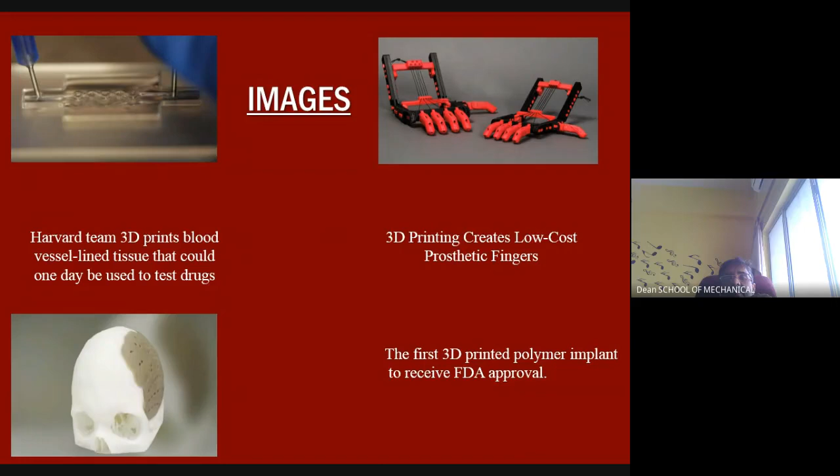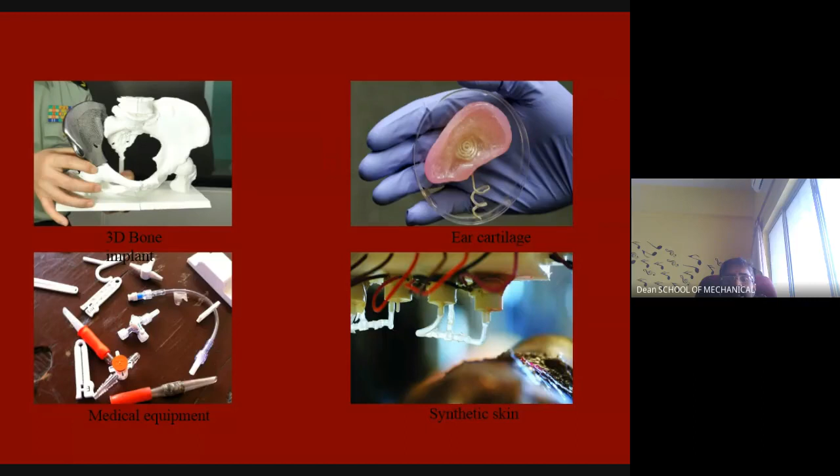A 3D printed heart from a Materialise HeartPrint catalog of cardiac models. These are all different medical equipment, and synthetic skins are also possible using 3D printing. 3D printing is uniquely diverse.

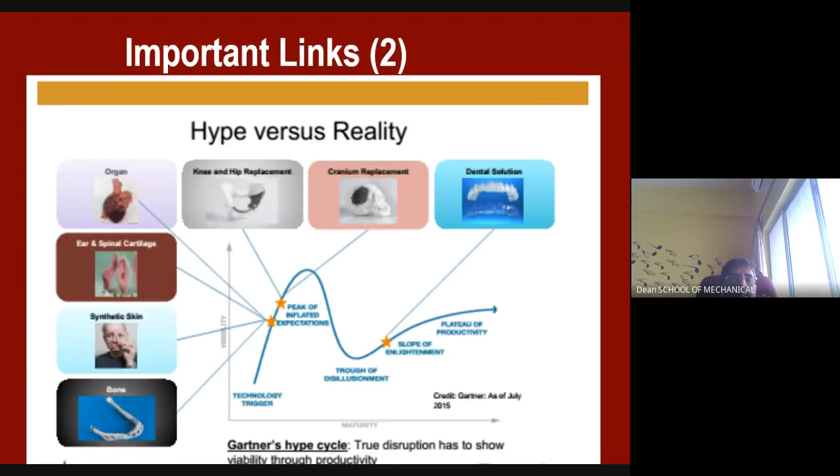You can see the 3D printing areas where you can find applications: 3D printing in medicine, customized and volume, hype versus reality, tissue printing flow illustration, and staging what 3D bioprinting brings to the table.

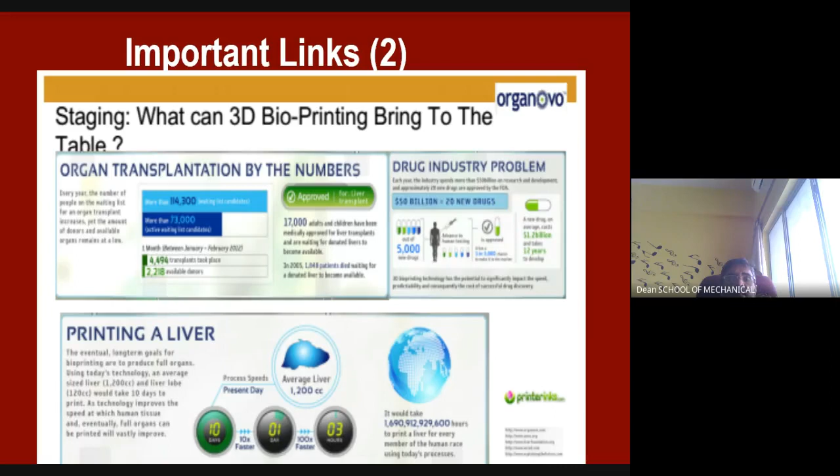This is a case study given by them. The references used for this presentation, the links and papers and articles used for this presentation, are important links from the manufacturer's point of view. Thank you, thank you.